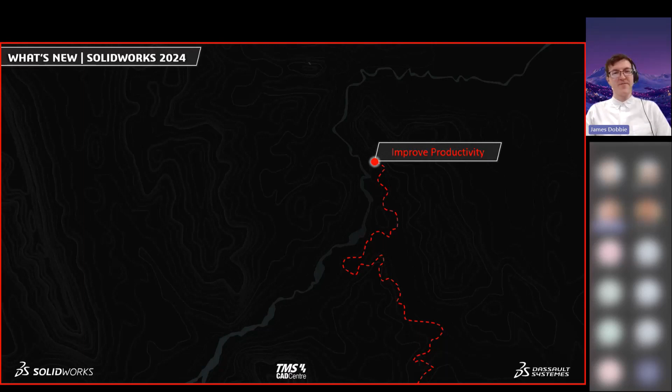To continue with the theme of adventure that this hand bike allows everyone to enjoy, we're going to take a look at the different enhancements coming to the 24 release. First up is improved productivity, where we'll see all the enhancements coming to the various desktop products you know and love.

Next we'll head on to Focus on Design, where we'll look at the future of design and collaboration with all the cloud services available today. Then finally, we'll take a look at Expand Horizons, where we'll showcase the newest in cloud-based modeling and advanced simulation tools available on the 3DEXPERIENCE platform.

This is the Bowhead Reach Adventure, a hand bike that allows you to explore all the wilderness you want to. The assembly we'll be looking at now is quite a meaty assembly. It's got over 1,000 components representing over 3,000 total bodies, and we'll be looking at various different sub-assemblies throughout.

We've got the handlebar and crank sub-assembly here, the front steering assembly here, the rear swing arm and suspension back here, the rear wheel assembly back here with all the hubs and spokes, and then we'll potentially be looking at various other parts as well. So that's an overview of the assembly we're going to be looking at here.

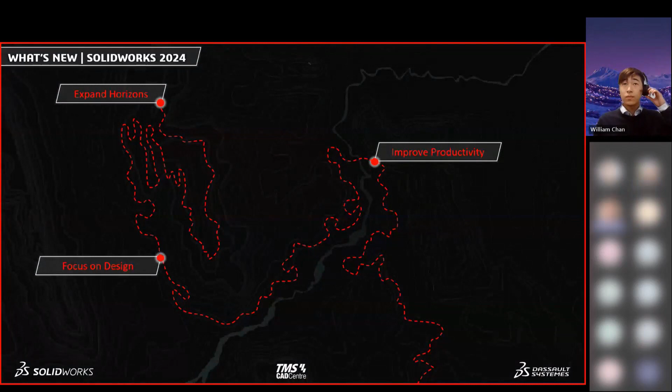So I'll pass you across to William, who will take you now into the first parts of the enhancements. Thank you, James. So we'll start off with the improved productivity section, where we'll have a look at some of the new features and enhancements to SOLIDWORKS 2024. We'll start off with user experience.

In 2024, there is now a new option to turn on hardware accelerated silhouette edges, which will provide massive performance gains in generating edges. It makes use of your GPU, and as you can see, with the hardware acceleration on, this greatly improves the display of edges. That can be enabled within the system options under the performance section.

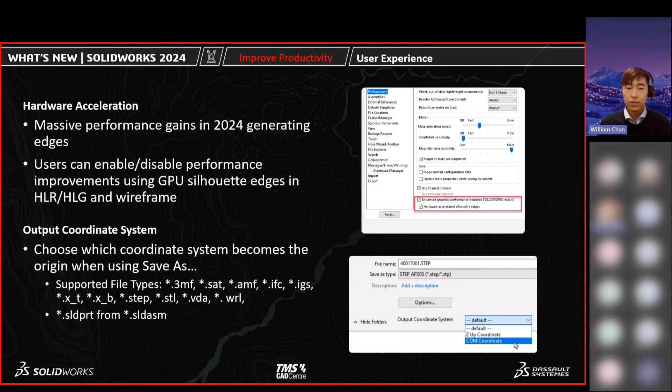The other enhancement to 2024 is that when you save a part as a step file or other supported CAD formats, such as IGS or STL, there's now the option to select a coordinate system to become the origin. This is a drop-down menu found at the bottom within the Save As dialog box.

Moving on to parts and features now, let's have a look at some of the new enhancements for 2024. The first enhancement that I'm sure you all look forward to is save to a previous version.

Let's start by opening this part, and essentially what we want to do is save this part to a previous version of SOLIDWORKS. To do this, we'll go to the Save As button here, press Save As, Copy and Continue, and then navigate down to the Save As type drop down. At the top here, you'll notice two save types: you can now save to SOLIDWORKS 2022 part and 2023 part, allowing us to save to a previous release of SOLIDWORKS up to 2 years back. We'll choose 2022 and then press save.

As long as there are no SOLIDWORKS 2024 enhancement features, you'll be able to save it and open it in 2022. The next enhancement involves the revolve cut command, which now has the addition of flip side to cut. Normally this cut would core out the interior of the part, but with flip side to cut, it cuts the exterior, giving you more flexibility with your designs.

We're also interested in what sort of bar stock would be required for this part, so to create this bounding box, we'll use the bounding box command. In the past, we only had the rectangular bounding box option; now in 2024, we also have the cylindrical bounding box. Currently this best fit option is based on the rectangular option, so it doesn't give us the best fit we're expecting, but that's fine - we can specify a custom plane for direction, and then confirming that, we get our cylindrical bounding box here.

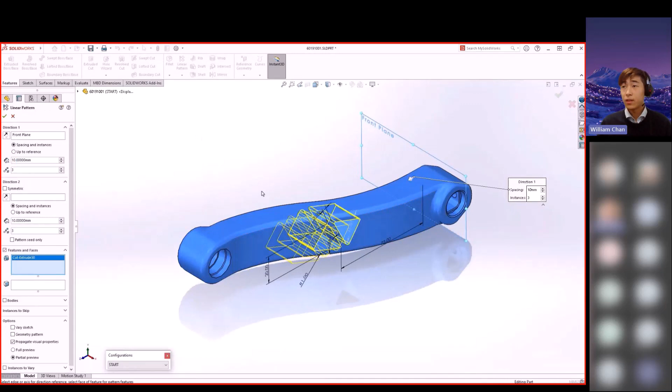We'll use the linear pattern command, and here you'll find a new option to create a symmetric linear pattern. We no longer need to use the pattern seed only option and specify the exact same settings in both fields. Just a nice little checkbox now to help speed up your workflow.

The next enhancement is a new option inside the untrim surface command. We'll first need to create a copy of our surface, using the copy offset surface set to 0, select the face, and copy it. We may want to capture the shut-off surfaces for these triangles if this part is going to be injection molded.

Previously this might have been quite difficult to achieve, but now in 2024, within the untrim surface command, there is an exclude parent surface option. We'll press that and then hide these, and we should now get these shut-off surfaces.

The next enhancements are sketch dimension preview and hole wizard positions. Let's open this part from the assembly, and we want to add in some additional holes. We'll first edit the sketch and draw in a rectangle here.

Now in 2024, you can enable sketch dimension previews, which allow you to select a sketch entity, and a gray dimension will show. This can then be selected, and we can type in our dimension and confirm it.

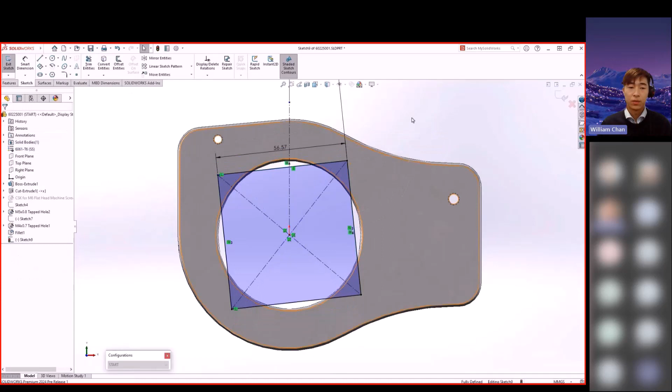Now that we're happy with our sketch, we'll add in our holes using the hole wizard command. In here, we want to define the standard and our hole size. I've got that all set up, and we'll head to the positions tab to have a look.

In 2024, you now have the ability to select an existing 2D sketch. We'll go ahead and select the sketch we did, and now it also allows us to use the endpoints of the end lines to create our hole positions. You can create instances on sketch geometry, or on construction geometry. We'll tick create instances on sketch geometry for this one.

We also have the option to skip certain instances. We can highlight the box there, select our point, and then choose not to create that hole for that one.

Finally, let's talk about some multi-body enhancements. In this example, we need to create a fixture or jig for welding this assembly, but we also want a precise understanding of the final weight of the assembly, and whether there are any interferences, say, between the weld bead and the jig.

We could do some of this inside the assembly, but we can't do a physical body weld with fillet bead, for example, although we could do some features like cuts. So we won't be able to get the actual true weight of the assembly, and it's also not easy to create the jig in the assembly either.

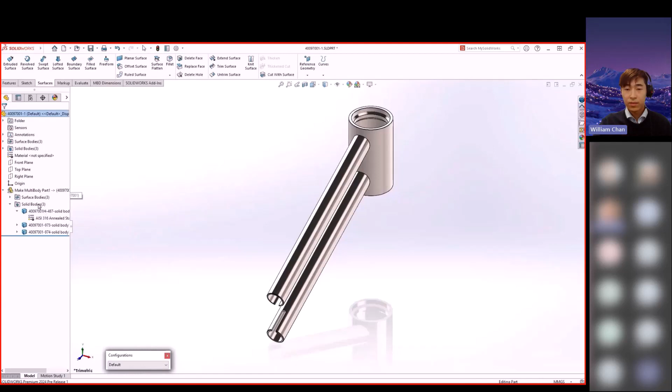So let's start creating our jig. I'm just going to use the normal surfacing commands, add a copy of those surfaces, and then thicken those up. This gives us a lot more flexibility within this environment, allowing us to use a lot more commands.

We can also show that it's in fact associative as well. So if we move the position of these bars in the assembly and then update that within the multi-body part environment, you can see that update reflected in there as well.

Another ability we have within the part environment is we can add or create material. So what we want to do here is add in our fillet beads, using the fillet bead command and selecting these faces. So if we've added the one on the top, we just need to add the one on the bottom as well.

Because these are solid bodies, we can see them in the cut list folder, giving us the ability to assign a material, which will now give us a more accurate reading of the overall weight.

Now, something else we want to do is try the interference detection. We're just going to press interference detection and calculate if there are any interferences. You can see that there are some interferences on the part, and that's fine.

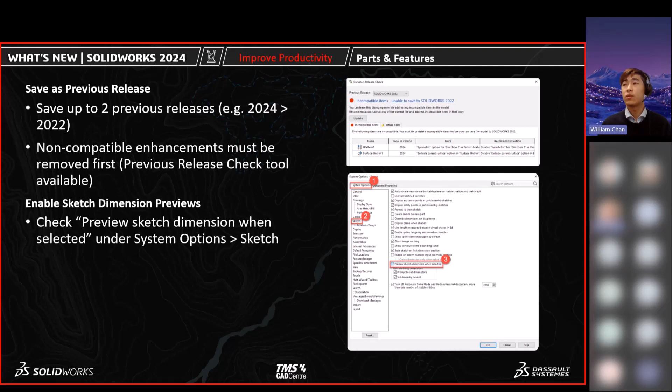So that's some of the enhancements to the parts and features of SOLIDWORKS 2024. In summary, we had the save as previous, and you can save back up to 2 previous releases, so 2023 and 2022. There is a previous release check tool, so you can use that to check if there's any 2024 enhancement features used within the part file. If there are any, you won't be able to save it back, so you can use this tool to check that. There's also the sketch dimension previews, which you can enable within the system options under the sketch section.

We also had a look at the flip side to cut, allowing you to cut out the exterior of the profile when using a revolve cut. There's also now the cylindrical bounding box option, allowing you to create bounding boxes to represent the stock size. The hole wizard has also...

has also added the ability to use the endpoints of sketch entities as well as construction geometry. So you can choose to use that if you want to. You can also skip instances if you need to. There's also the symmetrical linear pattern, just a nice tick box in the linear pattern command. And then also there's the exclude parent surface with the untrim surface command, to create the interior faces.

And then we also have the make multi-body part, allowing you to create a multi-body part from an assembly, giving you the ability to use a lot more commands and a bit more flexibility within your designs. So that is the parts and features.

I'll now pass you over to Craig, who will go over the sheet metal and structure systems.

All right, thanks for that there, William. Some nice enhancements there in the part environment, and I'm going to stick with the part environment enhancements, but focus a little bit more on some of the enhancements to sheet metal and structural systems, where we're going to look at some of the enhancements to structural systems first, and then we'll look at some of the enhancements in the sheet metal side of things.

For structural systems, we're going to focus on 3 main enhancements. We've got some changes to the corner grouping, which can be automated a little bit more now. When we've got multiple members coming together, there'll be some new options for the corner treatment. And then we'll also have some changes to the cut list and SOLIDWORKS file properties, or custom properties, where we can specify things like the units, which can be pulled through into the drawing environment as well.

For the structural systems side of things, as well as the sheet metal, we're actually going to be using the same kind of assembly that we've got here for this little cargo carrier. So we'll look at this for both of those.

What I've got open is the top level assembly, and I've got a little part open up here as well where I've got some planes and a bit of construction geometry we'll see in a moment. If you don't see the structural systems tab at the top, we can select that to turn it on, and I like to usually just show the single tab that I'm using at any given time.

Understanding the cargo carrier assembly that we'll use a little bit. This is where we'll put our bowhead onto, so we've got some slots there for the wheel, and we've actually got the back ramp in there as well that's going to be a little bit underdefined. So the back ramp, we could rotate that down, move our bowhead, load that up and then bring the ramp back up, that sort of idea, and attach that to our vehicle, probably with some wheels and stuff like that to help things out inside there.

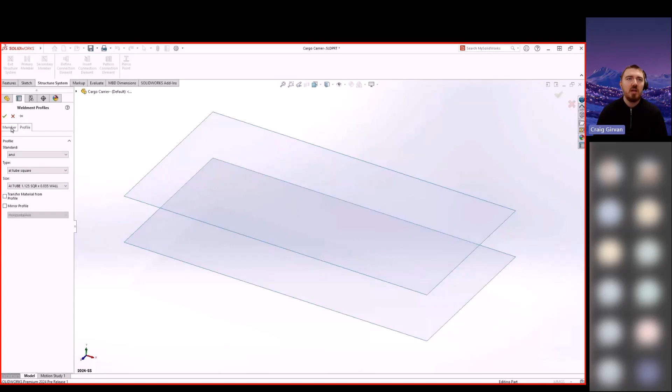So jumping back to our part, as if we were going to create that from scratch, we can start our structural systems inside there and begin with creating our primary members. Similar to weldments, we can select our profile that we're wanting to use for the structural system, and then we can start to define those primary members. We've got our different member types.

We're just going to use the 4 edges inside here, and we can deselect one of those edges if we don't want that. At that point, we can then select our secondary members, and I'm going to press the Q key here to show all my additional planes, and we'll use those planes to create our other secondary members, and then we can select our pairs between each of the primary members inside there. If there's any additional ones created inside there, we can just select those and hit our delete key to hide those out.

In this case, we're just creating more of the right-hand side where the wheel would slot in, and we can use something like the mirror command to get our other side.

When we exit the structural systems, that's where we're automatically taken into the corner treatment feature. This is where we'll see our first option, where we can use the automatic option and select a reference plane. That's where it can automatically add in some of our corner treatment, depending on what trim type we want underneath there, whether we want some bits extended.

In our next tab, we then have 3 different tabs for our simple 2 members and our more complex members, and down at the bottom here, we've got the corner treatment option. In our 2 members, we'll have the same kind of corner treatment section, but we'll now have this 4th option where we can have an open corner.

Sometimes when we're wanting to change between these, what we can actually do is zoom in on our particular area and add in maybe a little bit of an offset at the bottom. Sometimes that can make the preview a little bit easier to understand when we toggle between the different trim types, and then we can see the 4th option for a new kind of open corner. But we'll just change that back to 0 once we know that's the one we're after.

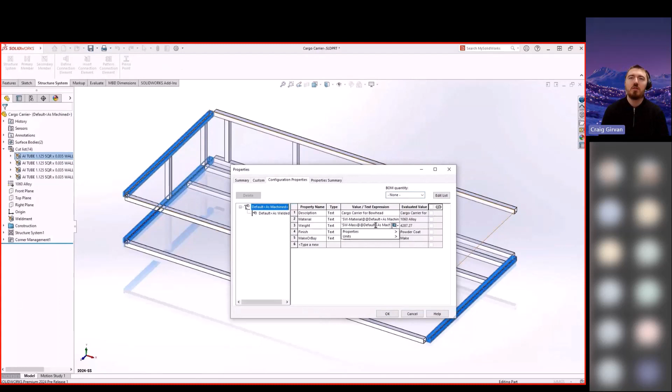If we go into our cut list properties, we might have properties in here for things like the length. Rather than having to type in manually kind of millimeters or inches, we now have a new option where we can add in the units, and it will just pull through from our document properties. We'll have the same option inside our custom properties, where we can add in things like the units for the length of something, or the units for the mass or weight. So we've got that in there in grams.

Just to show that that's a kind of live update, what we can do is come to the bottom right of SOLIDWORKS and change what our units are. So we're changing the length to meters and the weight to kilograms rather than grams. If we go back to either our cut list or our properties, we can see that that's updated. That information can then be pulled through into the drawing environment, so there's no need for us to have to type in G or KG every single time, which can be a good time saver.

At which point we can then just show the sheet metal component to go back to our kind of top level assembly. That's just some of the enhancements to the structural system side of things. We've got the new option for automatic corner grouping once we have created our secondary members, we've got that new open corner option that we used, and then some changes there to the units both in the cut list and in the custom properties.

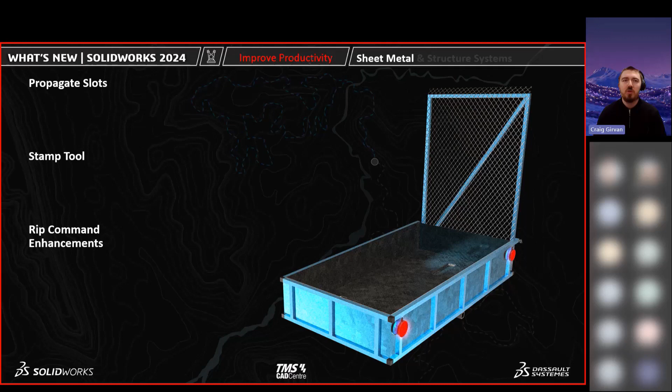So we'll switch over now to look at some of the enhancements in the sheet metal side of SOLIDWORKS, and we'll focus on a couple of options inside here. One will be the option when we're using tab and slots, where we can propagate the slots into other parts. We'll look at a new feature called the stamp tool. We'll then look at some changes and enhancements to the rip command, where we want to kind of flatten some of our sheet metal components.

We'll focus again on the same sort of assembly that we had looked at previously, but this time we'll focus in on more of the inside, where we've got some slots for where our wheels would insert. There is a third down the bottom left that's just a little bit hidden behind the front side. We'll look at creating those, and if we open up the sub-assembly, the individual parts that were created in sheet metal obviously come together, and that's where we'll have our little tab and slots inserted. If we zoom in, we can see these appearing at the bottom left corner and at the bottom.

But what we wanted to do is have our top right sheet metal component added in. We could use a mirror, but instead I'm just going to use copy with mates to copy that particular part over. We can specify some of our mates, we'll repeat the bottom coincident mate so it's nice and flat there, and then we'll just use some of our other planes to position that on the right hand side as required. But at this moment, if we zoom in, we see that they'll actually have a little bit of interference.

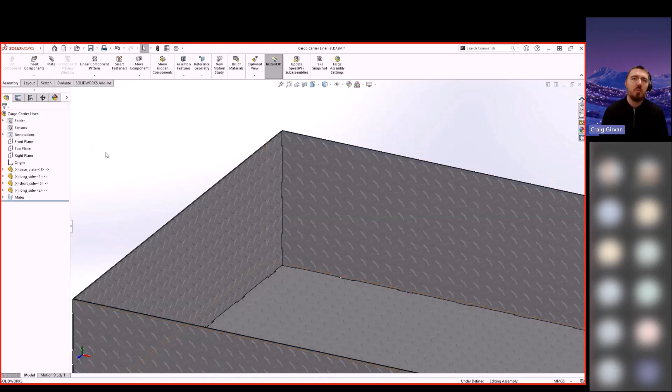We could even run an interference detection if we wanted to, but obviously I need some of those slots and stuff like that in this other component. So what we can do now is just right click that, and we'll have this new option to propagate into the slots. If there's more than one instance of this particular part, we can copy those slots into those other components as well.

Then if we ran our interference detection, we should find that there's no interference, and we've got the slots and tabs blended in nicely, just with a little bit of an offset between them. If we open up the bottom component, the base part, we can see all those little tabs and slots running along the top, left and bottom. But what we need to do is start to add in some of the things like the slots for the wheels.

What we've got here is a fairly simple sketch, pretty much just a rectangle that's been fully defined. If we go to our sheet metal tab, we could use this new stamp tool. The stamp tool may not automatically appear at the top of our command manager, but if we search for it in the search box at the top right of SOLIDWORKS, we can drag that feature into our command manager so we can easily access it in future. We can then just specify some values to get this fully defined.

Obviously what I want to make sure is there's no sharp corners in this part at all, so that once the wheel rolls onto it, we're not going to end up causing a puncture or anything like that. So we'll use quite a lot of these radius values, round out the corners inside there, and then we'll just accept that. We can see from quite a simple sketch, just a rectangle, we've added in quite a bit of geometry inside there.

We then just have a second sketch, which is just two sketch points that we can use for our sketch-driven pattern to get our second and third slot for our wheel. So we'll come to our different pattern types, select our sketch-driven pattern, and for our feature that we want to pattern, that's where we'll use our new stamp tool. We can select that, and that has now got our three different holes in there for our wheels.

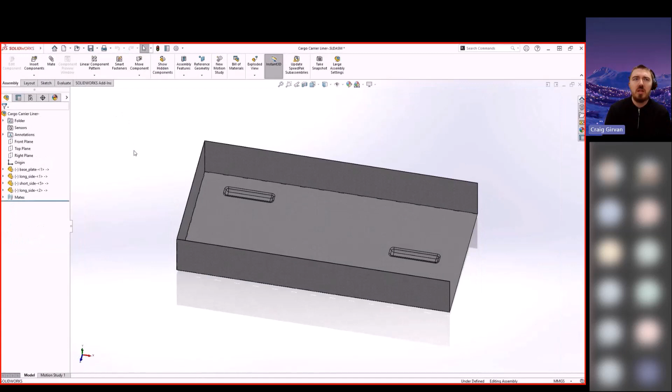We can jump back to the sub-assembly, and we can obviously see those inside there. And jumping back to a top level assembly, we'd see those in there as well.

What we might want to then do is create this little tail light that we might have, and this is again going to be another sheet metal component. So going back to a little bit of an earlier stage in the design, what we might have done is just created this using our extrude command. Obviously at the moment this cannot be flattened. But what we could do is inside our rip command, look at one or two of the new options inside there so that we will be able to flatten this and even add a little bit more detail inside there.

So what I'm going to do is select an edge in here. And then what we want to have had is just a single sketch point for where the rip would take place. So I'm going to select that sketch point at the very bottom. And then what we can do is specify some parameters on the left-hand side for how big the rip should be, how much of a gap should be created. We can specify that either by a set distance or an angle inside here.

So what I'm going to do is specify 3 degrees as the angle and make it symmetric, so there's 1.5 degrees going clockwise and 1.5 degrees going anti-clockwise. And if we need to, we can add an offset to that as well, depending on whether it's degrees or a set distance inside there.

Now that that's been ripped, we can use our S key to get up our quick features, and just use the insert bends command, select the edge that we want to be static, and then accept that. Now we've got our process bends, and we can hit our flatten button at the top to get to our flattened state, and select it again to get back into the folded state.

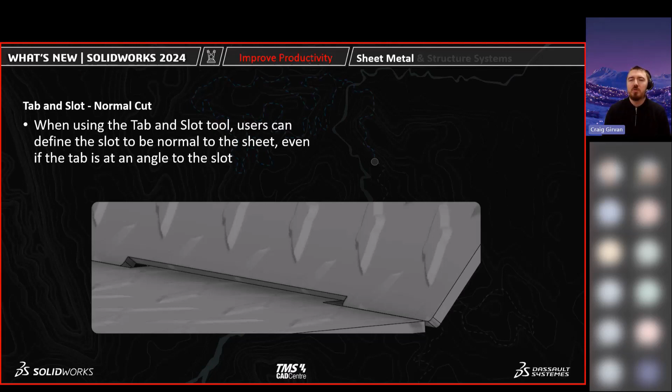So we do have options for a kind of normal cut if that's coming at a bit of an angle as well.

So I was looking at that propagate slots, and we've got our multiple different parts. The new stamp feature, which doesn't have to be a rectangle - you can create a bit more of a complex sketch if you want. And then some changes and enhancements to the rip command inside there.

So that was the enhancements to the sheet metal and structural systems side of things. Now it's going to stick with myself to look at some of the enhancements in the assembly environment. What we're going to look at is quite a few enhancements in here.

First one will be some changes to the insert components, so when we start to add in our second, third, fourth, and so on components, and start adding in our mates to get them in position, we'll have some changes to the width mate. And also if we're using mate references, we'll see some new options inside there.

When we are starting to add in multiple instances of a component, we'll have a new option where we can edit the component references in bulk, rather than having to do it manually one by one. If we're using the defeature tool, then we'll have some new rule-based options inside there.

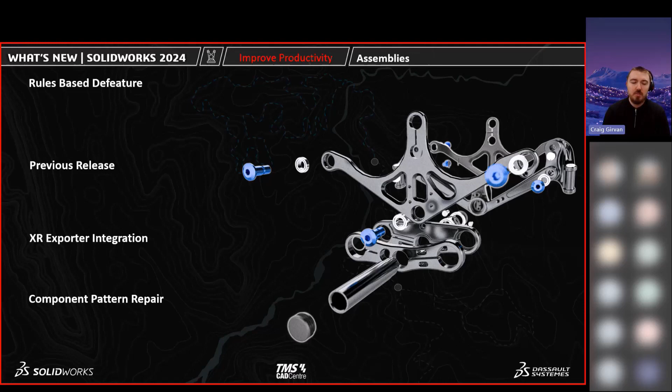Similar to what William showed, where we can save parts in a previous version, we'll have that for assemblies as well. We'll have built-in XR exporter integration when we come to save out things for VR and AR inside there - no need for an add-in anymore. And then we'll have an option where if component patterns start to lose some references, we can have that automatically repaired a bit inside here.

So we'll take a look at this little assembly. We've got some of our components already added in, but what I want to do is add one more of these little knuckle arms that's down at the bottom right - I want to add another in the top left. So let me go to my insert components to insert that particular part.

Before, we may see the configuration name, but what we can now have is actually the description shown inside here, which can make it a little easier to make sure we are indeed inserting the correct component. Once I've selected the correct component, we can change at the bottom how the green tick box will interact. Previously it would just fix the first component and then float all the other ones, but now we can change that to where it floats the components when we hit our green tick, or just fix the first time we use that. So we could use our float option, that way when I hit my green tick, it'll insert that part, but I'll be free to drag that part around as I want.

So what I might want to do is just drag that and rotate it a little bit to roughly position it where I want, which can sometimes make it a wee bit easier to add in some of our mates. Now ideally I should probably rotate this round about 180 degrees, because it'll create a little interference as I start to add the first couple of mates, but we'll show one of the enhancements added in last year that lets us tidy that up very easily.

Smart mates have been around SOLIDWORKS for ages, and we can do that without having to go into our mates command. So here I'm just dragging using our Alt key to add in our first concentric mate, and then we can use the same method to add in our second one - select one, hold down Control, then select the other circular edge or face, and add in our concentric mate inside there.

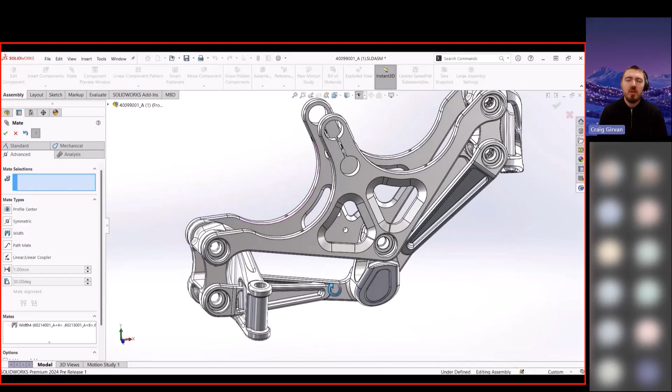We've got a wee bit of interference just because one of the concentric mates was added in the wrong direction. So what we might want to do is flip one of the mates round. If we come out of our mates feature and expand it out, we can find one of those concentric mates we just added, and from right click, we can flip the mate alignment. I'll just position it around. We'll accept the alignment - I don't need to change the other side, it's perfectly fine as it is.

I'll just quickly change the display state, which is where we've got some additional components that have already been hidden out. And what we might want to do is add in some more components on the right-hand side.

Now, I can hold my Alt key, or Control key to copy this, and then Alt key to add in both a coincident and a concentric mate. So what we can do is position this by using the circular edge with the hole inside here, using the Alt key. Remember, you can let go of the Alt key once you've started to drag and you've got that pin and slot icon inside there.

Now, this is obviously free to spin round. Sometimes to make that a bit easier, what we can do is right click and temporarily fix one of our other components. That'll be fixed in place so we can't drag that, and that means we can see that this can indeed rotate round.

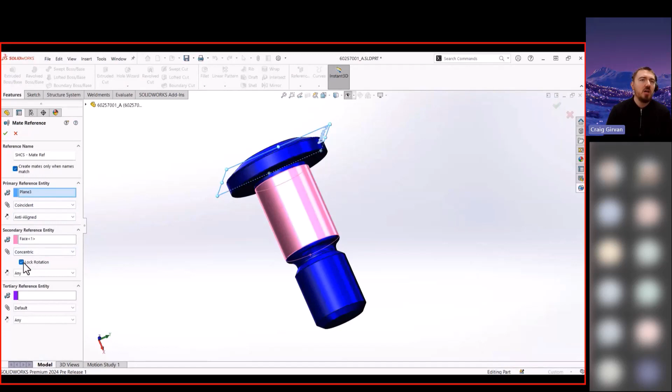Now what we could do is potentially prevent that from rotating. If in our components we were using mate references, when setting those up, right click to edit the existing mate reference, and we'll see two new options. First, we can select to only create mates when the names of the mates match. We'll also have this new option where we can lock the rotation, which prevents the component from spinning on its spot.

So we'll add in some of these additional blue components inside here. We've got two, the bottom left and bottom right already, and we can hold our Control key and copy those. But what we'll see is this new select mate reference option, and what it will do is detect if there's any similarly named mates that are the same size and type.

So we can choose to insert that into one of the other ones. When we hover over this, if I select the third one, rather than add it into the middle, I'll actually add it on the far right. In this case, I do want one in all three of those. So we've actually got 5 of these components, and there's another 5 on the back side, so 10 in total. If we look at our feature manager tree, we'll have a total of 10 of those components.

Also, I've got the 2 other components that we added in before we added those other last 3. So what I might do is just drag the 2 of those to the bottom of my tree. Remember, the order of parts in your assembly doesn't actually matter. So now we've got our 10 pivots next to each other.

What I can do is with all 10 of those selected, if I right click the top level assembly inside here, I'll have the option to edit the component references. This is where previously you'd have to right click each component one by one to edit this. What I'm going to do is add a little reference that specifies whether these are the pivots on the front or pivots on the back.

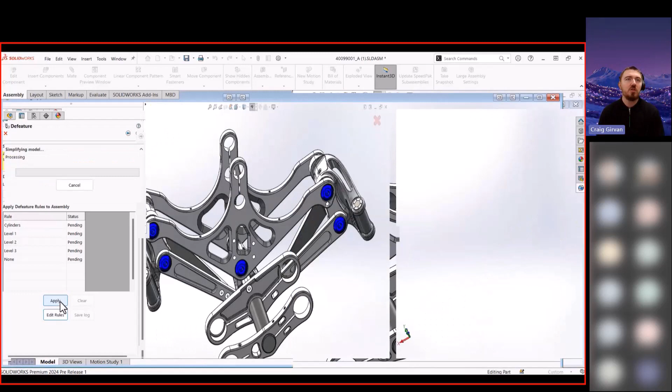What I've got set up here is where it's going to read from all of our individual parts a custom property called IP level, and for each part that's either a 1, 2, or 3. What we might choose is if there's a value of 1 for a part, that's where we might have our full copyright, our patent, all of that in place, so we're not really worried about customers or clients seeing all the detail. But when we've got a 2 or particularly a 3, that's where we maybe haven't got the patent and all of that in place just yet, so I do want to defeature that particular component.

We'll see here, once the defeature tool is generated, we'll see in the preview some of our components have been simplified quite a lot, hiding out a lot of the detail. But some of the components, like the ones we added on the far left and far right, we've still got all that detail added in there. And we can group some of those components together if need be.

Once we've generated that new one, we can either save that as a brand new document or save it as a new configuration. I'd probably recommend a new document personally, but you've got the options to choose what you need.

What we can then look to do is save that. If we change the save as type, similar to what William showed in the part environment, we'll have the option to save the assembly in 2023 or 2022 format, along with the parts that go with it, so someone can open it up in a previous version, going back 2 years. So we can hit save and save it that way.

What we also have under the save as type, particularly for assemblies, are two options you may have seen before if you installed the add-in - the GLTF and GLB formats. So if you're wanting to create any kind of VR, AR models, you can save out as those formats. Previously you just had to install the separate XR Exporter add-in, which was actually in beta before, but now that's fully integrated in SOLIDWORKS 2024.

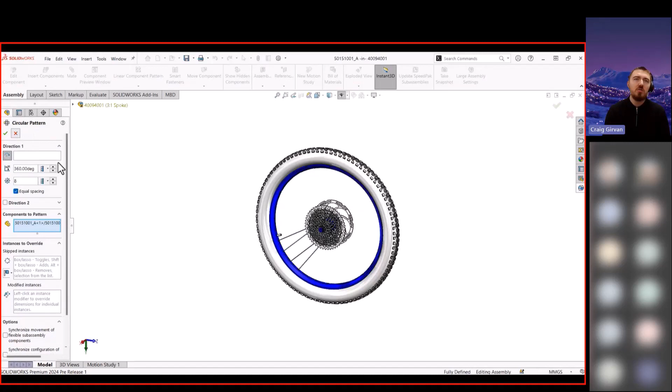So the issue here is with our circular pattern. If we edit that circular pattern, we'll find that the temporary axis used for the direction has been lost. Rather than me having to try and select an edge, I can just right click and there'll be a new option to auto repair that. It will look at where the temporary axis previously was, see if there's any circular edges in our model that have this same temporary axis in the same position, and automatically reuse that instead. That'll tidy up our model, and now that's looking fine.

So that was some of the enhancements in the assembly environment. Starting off, we looked at inserting components - we have new options there to show both the description, and we can change the behavior of how the green tick works with fix flow or fix the first. Some changes to the width mate, renaming and better behavior inside there. Some enhancements to the mate references if we're using that, and we can now add component references in bulk rather than having to do it one by one. The defeature tool can now be rule based, and we can also customize that rule. We can save the assembly as a previous version, similar to the part environment. We've got automatic XR Exporter integration inside there, and we can also automatically repair some of the assemblies as well.

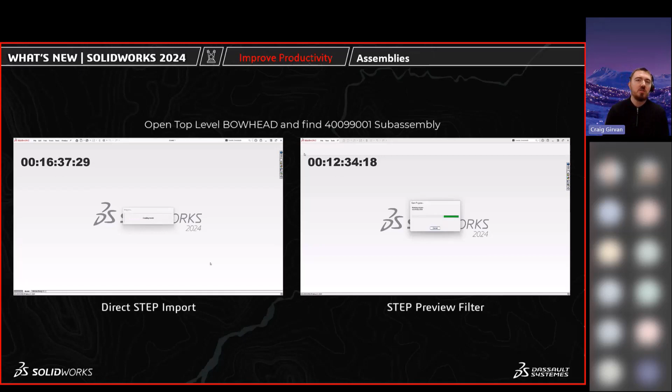What I've got here is a comparison of that new option we looked at when importing step files. On the right, we've got the preview filter turned on, and in this case we're going to import absolutely everything. So even though there's one or two extra clicks with the option turned on, because we've got the option to see a preview to check if it looks okay to begin with, what we'll actually find is with that option turned on, the import will be a lot quicker.

So on the right with that option on, we've got it imported in just over 12 minutes, whereas with that turned off, we're looking at just shy of 17 minutes. That's both with SOLIDWORKS 2024, just with the new option on the right - something I definitely would recommend. The only reason the two previews look a little different is because one of them has the RealView graphics turned on, but that doesn't really have an effect on the import time. That's obviously a little render of that particular assembly inside there.

One or two final enhancements in the assembly environment: if we open up an assembly and potentially we don't have some of the components - maybe because somebody hasn't sent us the components, or because we no longer need them, so somebody's deleted them in Windows or something like that - we'll now have an option where we can delete all the missing references in bulk. In this case it would delete 2, but we could delete as many as are missing.

We'll also have, when selecting our different components from the drop down at the top of SOLIDWORKS, the option to select all of our sub-assemblies that are set as flexible inside there. If we're creating mirrors, particularly opposite hand versions of the mirror, we'll now have a system option where we can preset a naming scheme. So rather than having to type in every single time the right image, dash mirror, dash new, or anything like that, we can preset that up in our system options.

Thanks, Craig. So now we're going to look at some of the enhancements to drawings, as Craig mentioned. Our first one here, we're going to look at...

Reattaching dangling dimensions, and chain dimensions as well. These are some nice enhancements. With chain dimensions, a nice way to create stack dimensions that are relative to each other's preceding features, the enhancement here is that they will now automatically come in aligned collinear.

That will reduce any manual cleanup steps to help you out. And the other change here is for any tight spots, as we can see, there will be a new system option that will automatically offset them as well, helping you put them in a bit quicker and reducing how much manual cleanup you need to do.

The other change when it comes to working with dimensions is if you hover over any dimension, it will now highlight the geometry it's attached to. So in the case of a dimension that goes between an edge and a circle center, if we hover over that, it will highlight those, making it easy to see what's attached to everything.

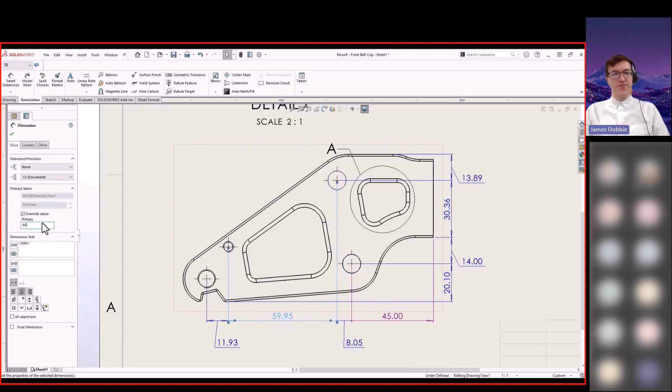The next thing we can do is a new option to highlight overridden dimensions. If we override a dimension, which is nice and easy to do, just select the dimension, say we want to override it, and pop in a value, we can now see that those are highlighted a different color.

The color used and the behavior of this is controlled in your system options and document properties. In document properties, you can go down and select the option to highlight the color, and what color is highlighted is controlled in your own system options. So if you don't like the default, you can always change that around.

That will allow you to see those overridden dimensions nice and easily. Then when it comes to restoring the original value, simply right click and select restore original value, and that gets you back to what they were. So nice enhancements there to overriding dimensions.

Just like with parts and assemblies, you can also save drawings back to previous versions. Simple case of just going to save as, picking the year from your drop down, and all of your referenced components, parts and assemblies within the drawing that are needed will be included in the save, and it'll save them with those.

A nice easy way to gather all the components, saves you having to figure out what assembly you need to save back. It pulls it all together in one go. And of course you can add prefixes, suffixes and all that at the same time.

Now when it comes to dangling dimensions, there's an enhancement here in terms of reattaching them easily. You simply right click on that dimension, hit reattach. The red X will show you what you're going to be reattaching. Then you just click the edge that you want to reattach that to.

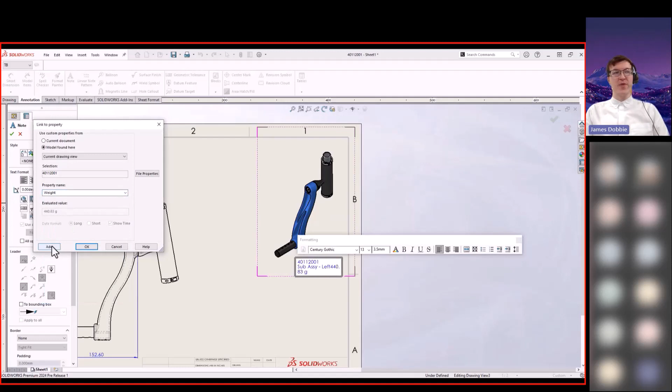That allows you to add multiple properties to your notes without having to keep going back and opening that up, so it's a real big time saver there. And then obviously if we change the configuration, all those properties will update nicely.

So next up here, we're going to look at MBD - that's the model-based definition where we can dimension in the 3D environment.

Also forgot to mention some other small enhancements that didn't quite make the clips. There'll be an option to improve your performance when opening and working with drawings, by setting them to by default open in detailing mode. Similar to your large assembly settings where you can define a threshold for when assemblies open in lightweight mode, this is an option to always open your drawings in detailing mode, which helps you open them a bit quicker.

You can also, when working with layers, select multiple in one go. So if you're deleting layers, changing colors, or changing line styles, you can select all those and work with them nice and easily.

The other thing here when it comes to exporting DXFs, there'll now be an option to exclude any hidden sketches. So if you haven't deleted them out or dealt with other difficult things, there's a nice option to exclude any that are hidden.

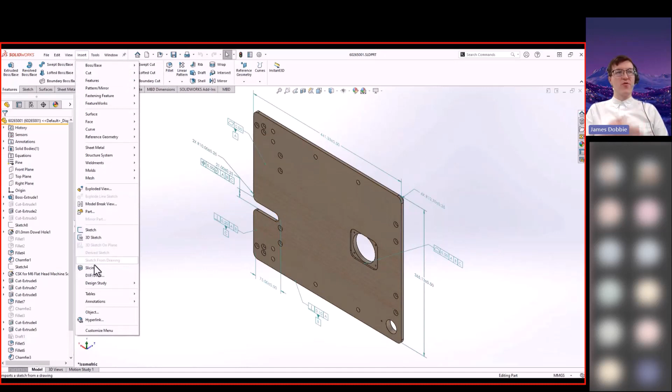So in this case, what we're going to do is look at some of the enhancements. First thing here is that there's now going to be an option to have the dimensions always display on top of the model. Previously, if those dimensions were attached to something on the back, and we were looking at the front, the leaders for those dimensions wouldn't appear - they'd be hidden behind the model. So that's a new option there.

Next thing with hole tables - a great way of reducing clutter if you've got lots of holes. To set those up, you just insert the hole table, pick the faces, define the origin here with the axes, and then pop that in. There'll also be cross highlighting, so when you highlight a particular entry in the hole table, that will highlight the hole on the part as well.

So now when it comes to saving out your MBD information, there are a couple of different ways you can do it - with 3D PDFs, step files, or eDrawings files. Now with your 3D PDFs, you've got lots of different templates, and included this year, you'll be able to also have your hole table on one page by itself. 3D PDFs are great because you only need to have Adobe Reader installed to use them.

The other enhancement here when it comes to step 242 is for the first time you'll be able to include your custom properties in your export. That allows any downstream applications or anything like that to read those properties there - a great handy feature when it comes to working with MBD.

The next thing we look at is the various tolerancing and dimensioning enhancements. There's been nice enhancements when it comes to those - we'll look at those now.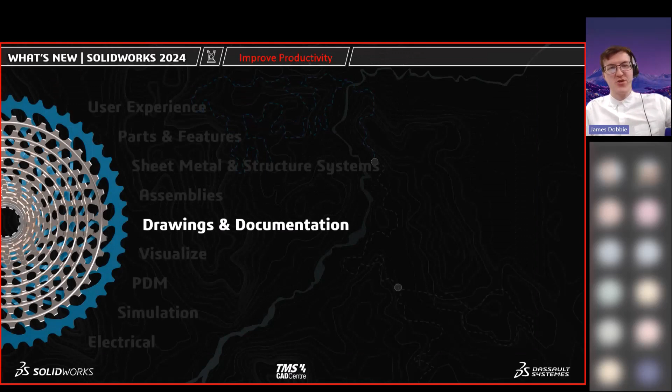Thank you, James. Now we'll have a look at Visualize. In 2024 Visualize, we see great improvements to the rendering power and a more streamlined user experience. Appearances are one of the most fundamental parts of using this rendering package.

With appearances, the format has now been completely overhauled with an all new DSPBR format, which stands for Dassault Systemes Physically Based Rendering. Here we can select the enterprise PBR shading model type, and now we have a lot more options, allowing you to create complex and nuanced appearances. With the goal of flexibility and consistency in mind, the DSPBR format is in line with industry standards, and it will become a universal format for communicating appearance data across all DS products.

The DSPBR format is well suited for making use of image texture maps, which are typically great for quality renderings. With this, we can select a single or multiple texture maps and simply drag and drop them from Windows Explorer onto the model, and they will be automatically pointed to a map slot. If multiple map slots are selected, the format will reference common naming conventions and auto-load them into the correct slots, allowing you to set up these appearances quite easily. Alternatively, textures can be added one by one by selecting the map slot and pressing the plus button, then choosing the appropriate file.

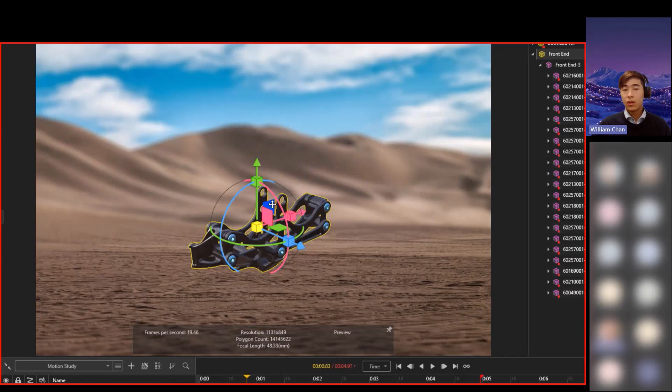Setting up your scene can be one of the more time-consuming parts of the rendering process. Visualize 2024 dramatically reduces this time with a revised manipulator. Here we have a new manipulator which looks similar but offers a much cleaner experience. The manipulator now highlights each control, making it more clear which action you're about to take. The scale tool is now fully integrated with the manipulator and will accommodate translate in all directions, scale in each direction as well as all directions, move in any plane direction, and rotate on any axis.

You can also now activate and control the manipulator through the keyboard. Translate, rotate, and scale can be launched with the keys G, R, and S, which you can of course customize if you want. Beyond that, each mode can be restricted to the X, Y, and Z axis. For example, if you press G and then Z, that restricts the move to the Z axis. Planar moves can also be restricted by pressing the Shift key - for example, pressing G, then Shift, then Z allows you to move the selection within the XY plane.

If we press the R key and then Y, this allows you to rotate your selection on the Y axis. Even more powerfully, you can now activate the local axis of an object when it is not aligned with the global axis. For example, if we press the G key, Z, and then a second tap of Z, this allows us to access the local axis of our selected object. Likewise, other axes can be accessed with the G key followed by double tapping the X or Y key.

Several interface elements have received a facelift for 2024, but the output wizard is one of the most used tools in day-to-day work, with convenient options like customizable presets for commonly used settings, and cleaned up tabs that only provide the necessary information. Control over configurations, multiple cameras, and multiple sets is now as simple as selecting the desired outputs from the drop-downs.

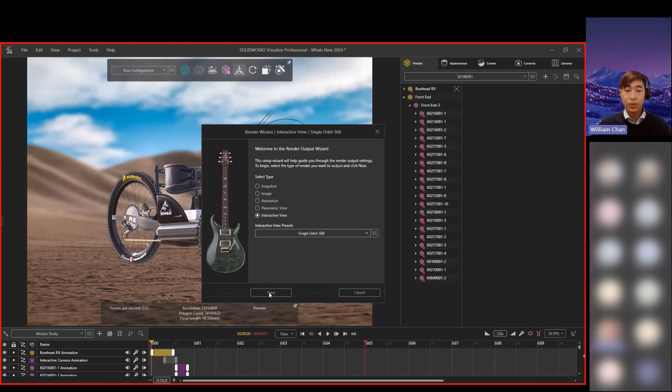More complex outputs, such as interactive renderings, have been simplified as well. Animation frames can now be used as interactive inputs, which opens up all kinds of creative options for interactive playback. The interactive outputs can now be previewed right within the output viewer, and it can also be exported for playback in the 3DSwym app within the 3DEXPERIENCE platform.

The final enhancement: sunlight environments can now be added to see how products will look in real time and place. The sunlight environment provides an updated compass rose so that north can be set manually or by selection on the model. A drop-down for position or coordinates can also be pasted in. There's also the ability to adjust the time of day and many more. An updated animation wizard now includes controls to set up animations of a product quickly and easily for a day or throughout a span of time.

So that's some of the enhancements in SOLIDWORKS 24. It's easier and faster than ever before to make your products look great.

As mentioned, we now have an all-new, powerful, flexible, and accessible appearance format, the DSPBR format, allowing us to create more complex appearances. We also see changes to the manipulator, enhancing the overall user experience, allowing you to use shortcut keys to activate and customize as required. There are also interface updates, so the wizards have been updated for greater clarity and ease of use. And then finally, we also see some improvements to the sunlight environment with an updated compass rose, allowing you to define a physical location, the compass direction, time of day, and many more.

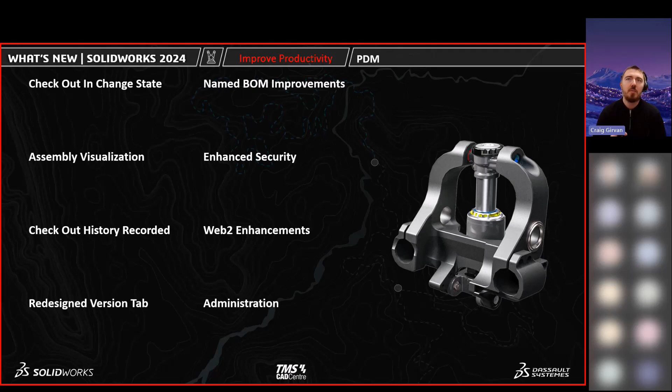What I've also done here is note that one or two of these enhancements will actually have been added in later service packs of 2023, so there's a little note at the bottom. Most of them will be enhancements in PDM 2024, but one will be in 2023 Service Pack 2, and another in about Service Pack 4. That will be highlighted at the bottom as we go through some of the next enhancements in PDM.

Starting us off, workflows have been a great way for a long time to show where a design and model is in the approval and development process. But when a file gets rejected and changes need to be made, what we can actually do during that transition is check those files out at the same time. So there's no need to change the state, reject it, and then check the files out separately.

When we're looking at assembly visualization inside SOLIDWORKS, we can change what information is being shown, but now at the bottom of this drop-down is a list of PDM variables. So we can potentially show the state of a file, seeing visually what files have been released, which are pending approval, work in progress, and so on, depending on what our states are called.

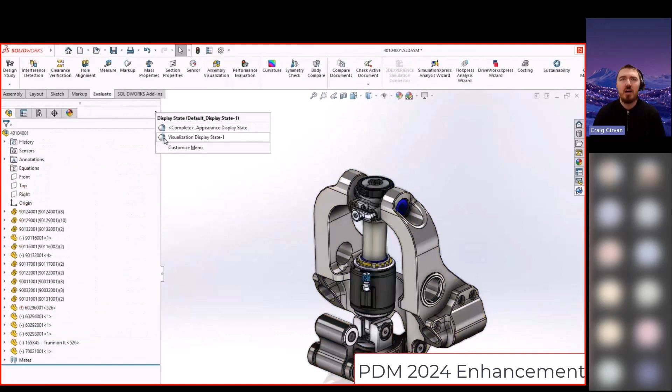We can move our rollback bar up and down to hide and show different features, and we can create different display states and leave that toggled on as we make changes. I'll make a small change by unsuppressing some folders to get more cutouts, and we can toggle between the display states at any point.

Since we've made a change to this model, we'll want to check that in, then submit it for approval, adding a comment. Now that we've checked that out, in the history of a file we can see when it's checked out, and who and when, and then see the history and get previous versions.

When we get that previous version, if we go to our Versions tab, we'll see that's completely changed. The top half shows the latest information about the file, and the bottom shows whatever version we're looking at—in this case version 2—with information related to that in the bottom half.

Moving one tab along, some enhancements in the bill of materials. With our named bill of materials, if any columns are hidden inside SOLIDWORKS, we can unhide or hide them on the PDM side, so we don't have to jump back to SOLIDWORKS just to unhide stuff, and we can make changes to a bunch of those at the same time.

In our Contains and Where Used tab, if we don't have permission to see some of the sub-assemblies or sub-components, they'll now be hidden out inside there, improving security.

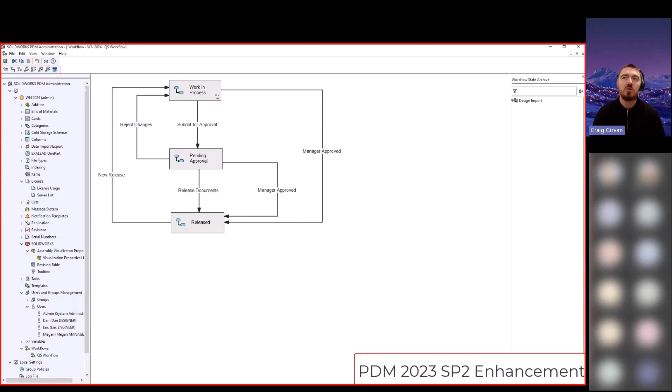Another enhancement, one I've seen a lot of customers ask for, is the ability to archive or hide any states no longer used in a workflow. Previously, if you tried to tidy up your workflow and delete a state, you'd get a message saying a file exists, or did exist, in that state, and you were unable to delete it, so you had to leave it off to the side, like what we've got here. But now you can actually archive those, which can really tidy up the workflow.

So that's some enhancements to checking out a file when changing the state, useful when files are getting rejected and you need to make edits. We've got assembly visualization integration to view that information visually inside SOLIDWORKS, and we can view when a file was checked out for better traceability of files.

The Versions tab in Windows Explorer has been redesigned to show a lot more information. We have some enhancements to the named bill of materials, so we can hide and show columns and edit multiple columns at the same time. The security is obviously updated with the contains and where used tree view, if you don't have permission to see certain files.

In the web app, we have the new grid view, and we can select what different versions we want to download. On the admin side, we can see who we're logged in as. We've got different permissions for the license, so server information and who's using a license, which you can also still see in the SNL manager if you've got that. And the archive states can be really handy on the workflow side of things.

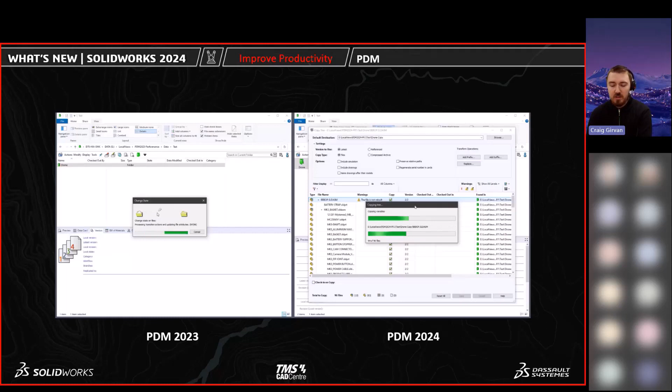We'll give it just a couple seconds and 2024 will have finished. I won't make you sit through the full 2023 video, but just so you know, in 2024 we were taking about 1 minute and 16 seconds. On the left in 2023, the full process took about 2.5 minutes - so pretty much half the time.

A couple more enhancements here in PDM: with PDM Professional, you can now have serial numbers integrated if you're using the dispatch. You can also do more actions in the dispatch, like moving, renaming files, and changing some of the data card variable information.

We'll also have a quick tool to change the state of a file when we're in the search. So if you've run a complete search, you'll have that now appear at the top, and you can use the keyboard shortcut Control T to start changing the state of a file.

We'll also have an option that used to be specific to the admin user, or the super admin as I like to call it, and we can give this to any user or group of users we want. That's the ability to see files that are in the private state - files users have created inside their PDM local view but haven't checked in yet. You'll never be able to edit them until the user checks them in, but you'll be able to see that they are indeed working on stuff in their local view.

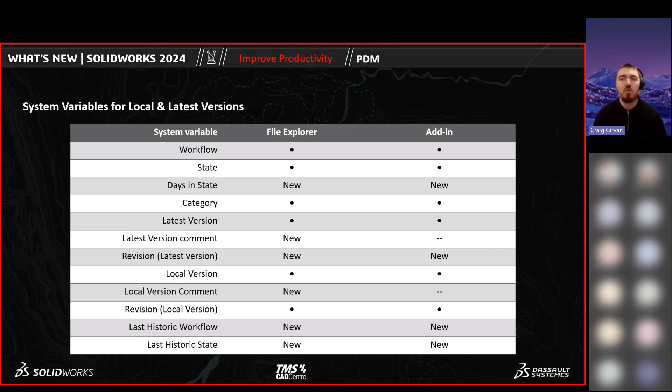And then obviously we've got some new system variables that are viewable when we're looking at the latest information. So whether it's Windows File Explorer or the add-in inside SolidWorks, we'll be able to see more information. That's what we've got here marked with the new option. And that's the enhancements to PDM.

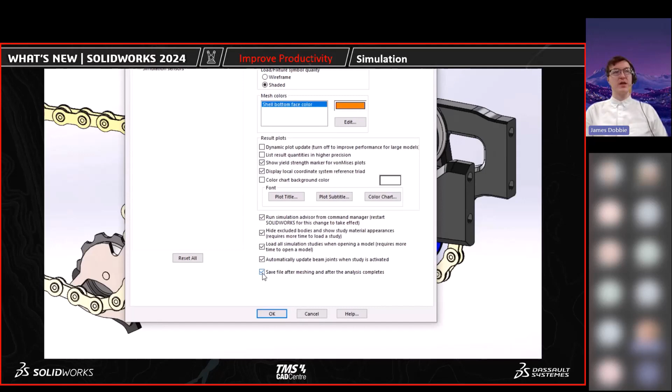Next we're going to look at copying our studies. If you know you're going to maybe change the mesh, maybe use a different mesh, or make some changes to the model, rather than have to copy the mesh and the results with that study, you can now set the default behavior to choose what you want to do. That will just help save disk space and help you copy things quicker. And on a per-study basis, if you do want to include the mesh, for example, you can still include the mesh when copying that specific study.

So what we're going to look at here is the chain tensioner. This is where the chain is coming from the rider arms, coming down and then transferring it to the rear wheel. You want to make sure that when the chain is running through the chain tensioner, it keeps both chains on the cogs, ensuring the chain doesn't drop. Last thing you want is when you're pedaling away, the chain drops and you're suddenly left with no power. So in this case, we're going to load up a prepared configuration of this part, simplifying it out a bit.

Then what we're going to do is start setting it up. In this case, it's bolted to the tensioner by 2 bearings. So what we want to do is replace these physical models with our virtual connectors, just to allow us to precisely enter in the properties of those. So in this case, we can come in here and suppress out those parts that we're not going to need.

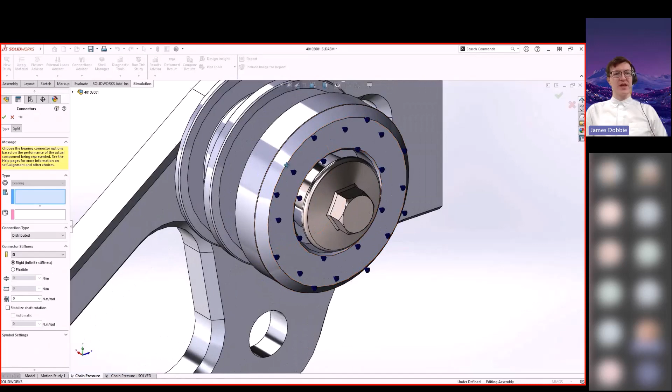And then what we want to do is set up our bearing connectors. Now that we've suppressed those parts out, we can come in and put in a bearing connector. One's already been created for us, so we just pop in the other one. It's a case of coming in, popping in our bearing connector, choosing the outer face of the shaft. Now, a cool tip is if you press the right mouse button, it will automatically jump you down to the next box, from the blue to the pink selection, to make that a bit quicker when making your selections. That's a nice tip just to save you a bit of time.

Now the next thing we have here is the options we have for the connection type. So this new one, distributed coupling, allows the faces that are attached to the bearing to deform. Just a bit more of a realistic representation of your bearing behavior, so we can select that there.

And now we're going to add in some of our lateral and axial stiffness to the bearing, as well as defining the new tilt stiffness, and the extra option there, the torsional stiffness as well. So lots of new options in there that we can control to more realistically represent our new bearing enhanced connector. So the next thing we want to do, now we've set up the connections, is apply the loads.

In this case here, we're just going to use split lines to split the faces of the rollers, just to more realistically represent the loads. By pinning our property manager open, it's going to allow us to add multiple loads in one go without having to keep coming back and selecting the option to add a new force. So we'll select the bottom bit of the face here, add in our force, pop that in, and now we can go in and select our next face, add in our force. Then once we're done adding all our forces, we can come in and unpin that, so now when we hit the green tick that'll close that property manager away. It's a nice handy thing you can do there, just to add multiple forces nice and quickly.

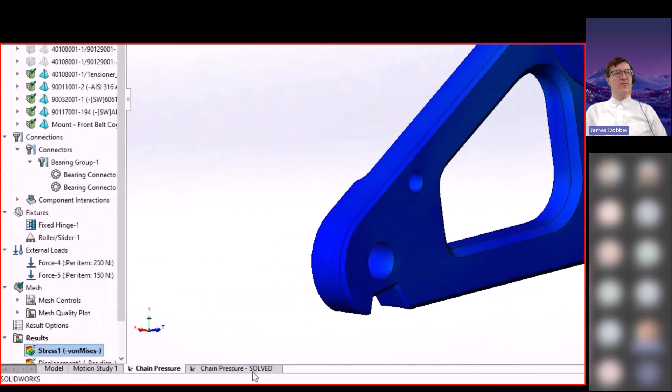So now what we want to do, I've got a nice solve one here with some different plots. Looking at the stress of the part, we can animate them to see how it moves. We can see a lot of the stress coming from that bolted shaft there that connects it, so that's our main area of interest. Then we can check out some other plots like displacement, see what's moving the most there. We could see from that animation, obviously exaggerated, where all that was coming from. So now we can look at that and really use that to investigate all those areas, and we've got all the different plots that we can get our results out of.

So definitely giving you a bit more realistic options to represent bearings, and just to really help you run the simulation quicker and also get more realistic insights into your designs there.

Some other enhancements: there's a new plot to identify locations where there's any contact convergence issues, so that's been added. There's also been some enhancements to the meshing performance when it comes to using the blended curvature-based mesher, so for any parts where you do have curvature involved, using that blended curvature you'll get a bit better performance when it comes to meshing.

Next thing we have, looking at the plastics side of simulation, there's been some enhancements here in terms of the injection location advisor. That'll take you through and suggest some optimal gate locations, so it's definitely going to improve the user experience when using that. Saves you having to rely on experience or guesswork where to position them, it'll give you a good starting point of where you want to place your gates.

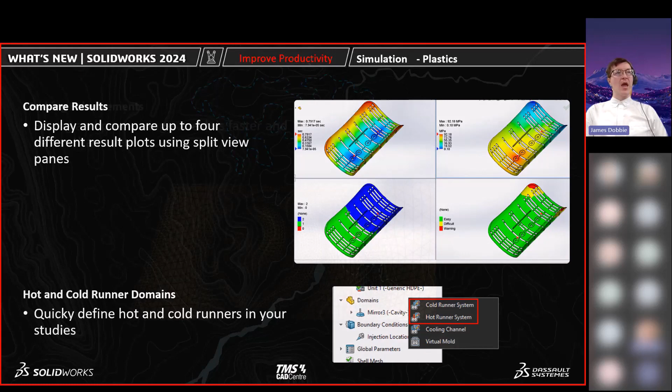And also, with plastics, it's had similar enhancements when it comes to meshing. It'll mesh and save that mesh faster than ever, saving you even more time.

So what I'll now do is pass you across to William, who'll take a look at the electrical side of things.

Thank you, James. So we'll now have a look at some of the enhancements to SOLIDWORKS Electrical 2024, looking at enhancements to electrical schematic, electrical 3D, as well as electrical routing.

Starting off with electrical schematic. In 2024, you can now insert auto balloons within a 2D cabinet drawing, allowing you to quickly place these balloons within the optimal position. This can be paired with a BOM table as well, that allows you to locate the footprint using the hyperlinks embedded within the BOM table. Just a nice additional feature there.

The next enhancement improves report readability. In 2024, you can now condense component marks or any text matching pattern to a range. For example, instead of marks A1, A2, A3, you can now condense this to just A1 to A3. This helps save more space on your pages and minimizes tables being split onto multiple pages.

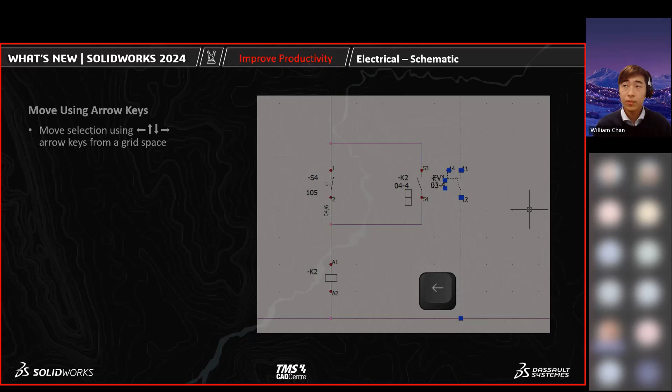Previously when deleting a manufactured part from a component, the manufacturer data was still kept inside the properties of the component. Now in 2024, you can configure your project to reset the manufacturer part information from the component, which means when you delete the manufactured part, the manufacturer data is also deleted from the component. Another nice time-saving option.

Another update to electrical schematic in 2024 is the grid size being able to auto-adapt to high-resolution screens, such as 4K displays. Before, the grid pixels on these high-resolution displays were relatively small and difficult to see. Now it can adapt to whichever resolution the screen is set to, improving the overall visibility.

So just a few nice enhancements there. We've got the auto balloon in 2D cabinets, component marks where you can create a range within the reports, the ability to use your arrow keys to move entities around on the page, the auto-adapt grid size for larger display monitors, as well as the clear manufacturing part info option when you delete a manufactured part from a component.

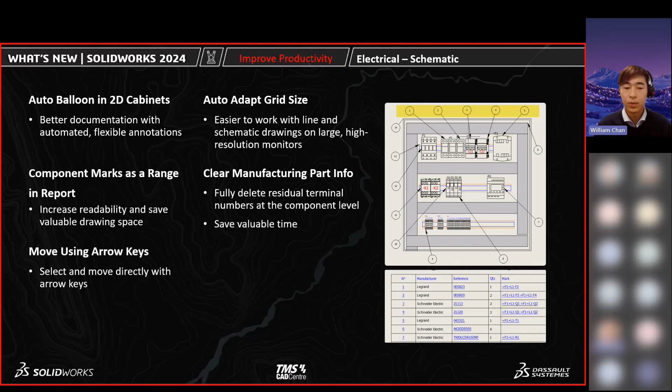Let's now have a look at the enhancements to electrical 3D. In 2024, there is a new option to route the active location only. We can see here we have our location L2, which has all our connectors inserted to the assembly already. Let's go to the route harness command, and in here we can find a new option to route active location only. Enabling that, and then we'll just complete the route harness command, allowing us to generate the harness in location L2. We can see our other route is unaffected as the connectors are in a separate location.

The next enhancement is the ability to filter components in the electrical management tree, giving you more control over what you want to see within the tree. Pressing the filter icon, we can filter by associated manufacturer parts, accessory manufacturer parts, auxiliary, as well as manufacturer parts excluded from the BOM. You can check any of these options simultaneously or just completely turn the filters off as well.

So we just went through the route active location option and filter manufacturer parts. Some additional enhancements for electrical 3D in 2024 includes the ability to choose whether, when you duplicate a project, it should remove or retain a link to the original assembly.

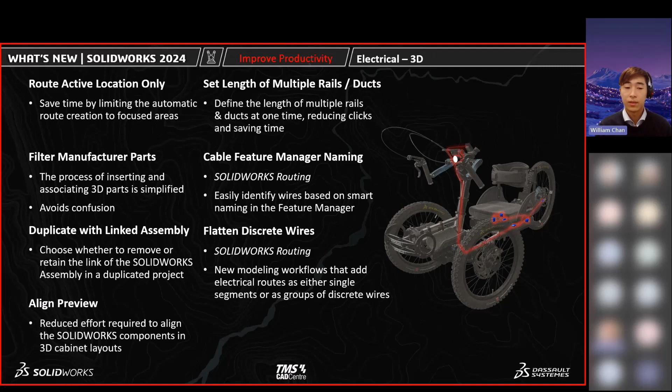The final enhancement with electrical routing is the ability to create a distinct route for each wire, or merge wires into a single route for discrete wires using the auto route tool. This allows you to visualize each wire in a bundle distinctly in 3D and then flatten them. That was just some of the enhancements to electrical, and that completes our improved productivity section.

I'll now pass you to James, who will go over the focus on design section. Thank you, William. So here I'm going to take you through the focus on design, which will look at all the various cloud services and how you can use them, all available for you today on any new licenses or upgrading existing ones.

First of all, we'll take a wee look at Bowhead and how they use and take advantage of cloud services. Just bring the video here. There we go.

We are using the platform to store all of our CAD data, all of our test reports, and non-CAD documentation on 3D Space app of the platform. We use the maturity states to control if a particular document, part file, or drawing is being worked on or if it's released. This helps us to understand what is the latest revision or the latest state of a drawing or file.

Prior to using the platform, revision control was basically renaming your part file to be revision 1.1, 1.2. There were instances where there was a final revision, then there was another final revision. So we were using computers, but it felt like we were using Stone Age technology just to manage revisions.

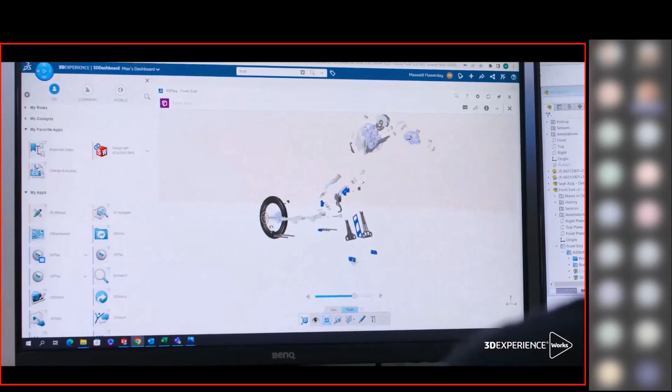One of the things that I really enjoyed was giving access to the platform to other non-CAD users in the company who needed to be a part of it because they do so much with the data that is on there. And I didn't really have to hold their hand and teach them. I just had to send them a link where they created their user credentials and they started using the system like pros from day one.

So there we've had a wee intro to see how Bowhead used their cloud services. In this instance, we split the cloud services into almost three different buckets, each progressively taking more advantage of what's available in the platform.

There's also different ways you can share, whether you want to share a part that's editable, like with a SolidWorks part file, or a 3D XML, which is the 3DEXPERIENCE file type that's almost a view-only sort of mode. It's a nice feature to get some feedback with external collaborators.

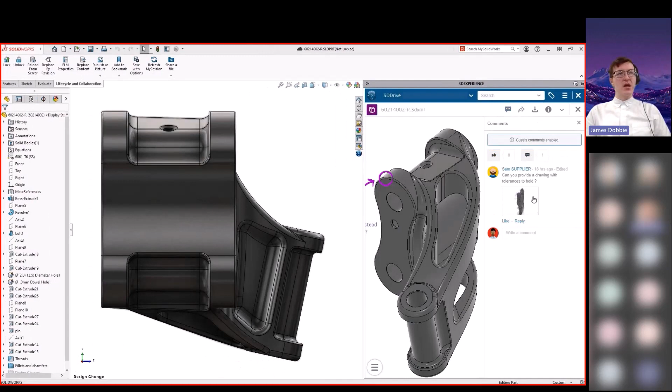They just save that as a comment and post it to you with a wee message. Got our information, they can then give a wee reply there. Then within SolidWorks, you'll get a notification to say there's been a comment added. You can open that up in your task pane, click on their comment, and see all the annotations they made, especially from the view they made it in.

So you can exactly see what they were looking at when they made that comment, and now action those changes. Then we can save that out to the platform. Here we can simply add revision comments - this is a new revision. We hit save and that will upload it to the platform. So on the drawing we've got a revision table that automatically updates, pulls in those comments, and helps you keep track of all the progress on the design.

So there's no need to keep moving your folders around - it's all there for you to keep track of, so you don't have to dive around folders all day. With the new revision available, you can now choose to share this drawing, just like sharing a part, and share that out as a PDF nice and easily in the same way. You can control access to that with either emails or almost like a public link.

Obviously the 3DEXPERIENCE platform is your design hub. You get powerful search capabilities in terms of finding files, and you'll be able to find your assembly design with ease, fully supporting all the favorite features and things like references.

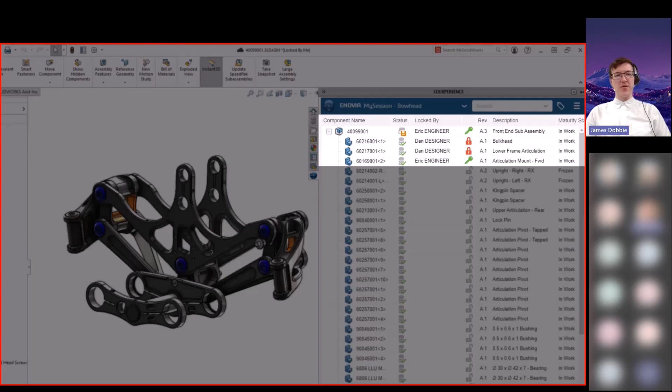With all your designs securely stored in the cloud, you can access them from anywhere you've got a browser and an internet connection. You can preview your designs in the browser straight away.

So if you're on a trip visiting potential clients and need to show them parts, rather than finding someone back home to email parts back and forth, you can just log into a browser and show them there. You're able to take advantage of all the powerful capabilities for reviewing designs.

You can also explore the structure of your design here, with built-in search tools allowing you to easily navigate to specific components of interest. You'll be able to focus on specific parts and access all the associated custom properties, all without having to open SolidWorks.

You can do it all in the cloud. You don't need to be a SolidWorks user to take advantage of all this information available.

When you're ready to bring more structure to your engineering process, you can use cloud services to use tags to filter your designs by status, formalizing your release process. It's all done with a nice drag and drop that lets you move through that design route—in this case, just drag and drop files.

We're now sitting on release here, and we've got this route that's going to take us through that path, whether it's a linear approval or parallel approval. You can assign that to various members of the team.

You've got all these comments as you go through, and here we've got different information we can pull up on that part through the different history as well. We can see exactly who made what changes and when.

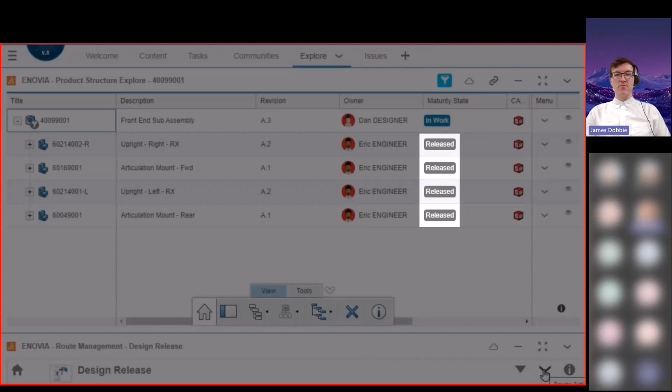So not only can you manage your approval process, you can also track and resolve any design issues. These can all be easily visualized in a list depending on their status, or visualized in the assembly itself with little tags, providing feedback on what the issue is and who has identified it.

You've got that public comment stream as well that everyone can access within your team, with detailed descriptions you can go in and create for that issue. In this case, for a quote, we've got the different files attached to it, so we know exactly what files are involved, who has been assigned to do it, and who owns the task.

And we can always comment on it here, which saves things being lost in an email chain. We've got all the comments nicely to hand there.

Once you've done that, it's just a simple drag and drop to move that task into the next step—in this case, that was 'in work.' We've made the changes we need, and we can export all this information out if we need to compile any reports, nice and easily.

If you need to keep track of any issues for design meetings, you've got all that available to you in a nice pre-formatted presentation, which you can then tweak to your own desires.

That's really just the start of the cloud services. It opens the door to using the next generation of design tools, more powerful simulation tools, and other manufacturing tools as well. You can really accelerate your design process and make things more advanced and complicated than you could potentially do in desktop SolidWorks. It allows you to stay focused on the design without having to worry about all the extra management, which is taken care of.

So what I'm going to do is take us through the next section of the cloud services, covering expanding horizons. We'll split into two sections: first I'll take you through the next generation design, then it'll be back to James for simulation. Inside next generation design, we'll cover four main sections: X-Shape, X-Design, X-Generative Design, and Lattice Design. These are all different ways we can create our models in the platform.

With X-Shape we get more of a free-form modeling idea, where we can push and pull our model apart, almost like clay modeling. X-Design is a bit more like what you'll be familiar with from desktop SolidWorks, with the usual features, plus some enhancements. X-Generative Design is a new app where we can take a model we've created, whether with X-Shape or X-Design, and start to create alternate versions, almost like configurations, with different design looks using rule-based modeling.

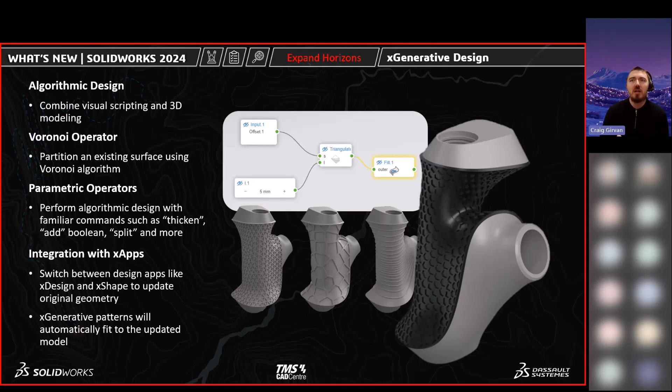Then we'll look at something new called Lattice Design. This is where we might want to create the internal section of a particular part to reduce the weight of the component while still maintaining good structural integrity, so we can look at different lattice designs inside there.

When you start to evolve your SolidWorks designs and inspiration comes to mind, you don't want to be limited by the CAD package you've got installed. That's where we can use the 3DEXPERIENCE platform and its different creative apps to bring your ideas to life, whether through freeform subdivision, surface modeling, traditional parametric modeling, algorithmic design, and more.

With all of these tools we've got the same built-in collaboration features that James just went through, making it easy to share ideas, feedback, document and create markups, and all that sort of thing. We'll go through X-Shape, X-Design, X-Generative Design, and Lattice Design.

These are designed to work in conjunction with SolidWorks, not to replace it. Desktop SolidWorks that you know and love isn't going anywhere. These work hand in hand, so you can easily jump back and forth between them, and we'll see that in the demo, jumping back to SolidWorks at certain points.

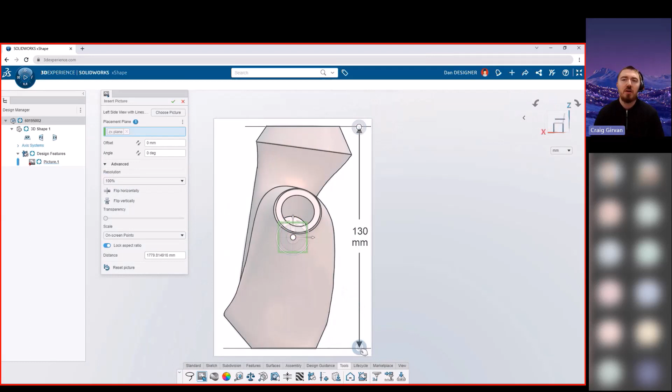We might want to insert sketch pictures to give us a rough outline of our model, then create a basic box shape and split that up into a number of sections. Then we can start to push and pull any faces or vertex points to give us a very rough outline, without having to create sketches from scratch, which might otherwise take hours for more complex shapes.

We can start to snap entities into line, dragging and dropping them to particular endpoints in our sketch picture. If we want more detail, we can split our sections up or create extrudes to add finer detail. Any edges can be made sharper or more rounded depending on how much we want sharp corners, and we can push and pull those values by set dimensions if needed.

We can also draw in where we want things to align. Obviously if we're doing this on a tablet with a touch screen it'll be a little cleaner, but we can still do that all with our mouse if we want to. We can copy and paste any previous surfaces to explore new design concepts, potentially scale them up if we need to for any sort of injection molding.

And we can create mirrors using our reflect tool, so we can select what we want to mirror. And we can create our section views, and while in that section view it might make it a little easier for us to push and pull points and see how it behaves.

And we can use our mesh tools to see what the inside shape of that would look like, so we're pushing and pulling points inside the model. We can also turn on that graphical color if we want to see how our surface blends together, similar to the curvature tool inside SolidWorks.

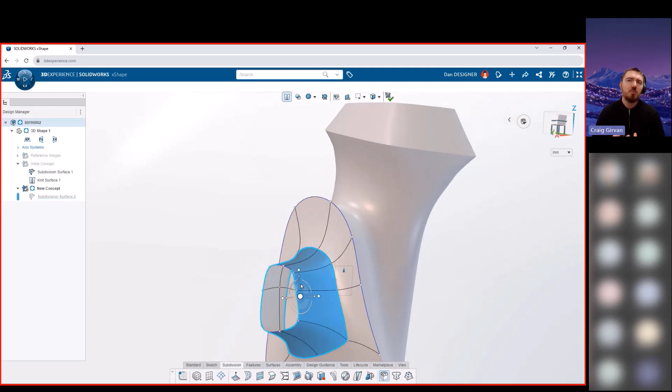We'll pull out this particular section, and what we might want to do is soft select some of the edges so we can try and keep a nice planar surface. We can pick a radius value, and with a nice planar surface we can create a new circle sketch on the side there, which we can use to create a hole cutout.

So we're starting to remove material, which we could also jump back into SolidWorks if we wanted to do a simple extrude cut. We could do that either in SolidWorks, or we could look to use Xdesign to do that.

Inside Xdesign, we can create either fillets or chamfers, or we can use what's referred to as our super feature. We can easily jump between an extrude, a revolve, or a sweep, so if we change our mind and want to use one of the other ones, we don't have to delete the feature and create a separate one — we can easily swap between them.

We'll have similar features to before, where we can add in our hole wizard, and once we've done that we can add things like threads inside there. We've also got similar surfacing tools where we can thicken faces, so if we start to do any surface modeling, we've got that inside there.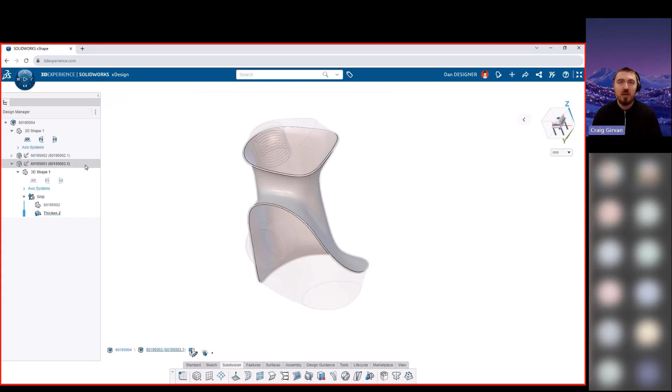And then we can combine those together to form an assembly. Still in that same Xdesign environment, same browser page, we can start to combine multiple components together to form our assembly. If we want to switch app, we can press our compass and potentially switch over to the X Generative Design app.

In here, we might take our design that we've already created and set certain rules and parameters so that we could potentially allow certain values to change, and then we can see what those particularly look like. So we might end up with half a dozen, 10, 20 different designs of our model.

And then we could look to compare those either by having different revisions of our model, or we could create different iterations of our model. So these are all still at revision A1, but we might have different models.

And if we've got to the point where we've created some of those, we might want to get them 3D printed so we can see almost like a bit of a prototype, and actually hold that in our hands. So if this is potentially going to be a grip that might be used in our vehicle, we might want to see what that feels like.

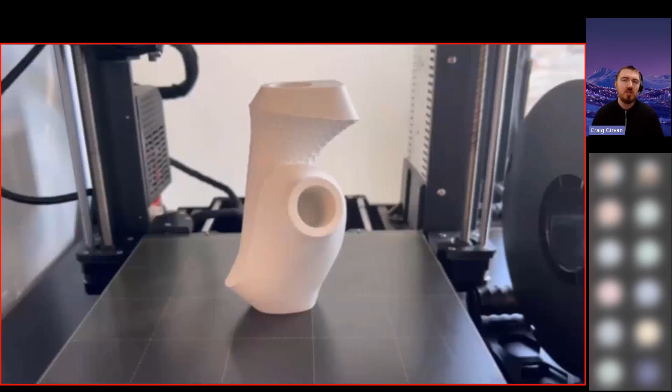So we can put in our parameters if we've got our own 3D printer, or we can look to outsource this if need be. And then we've got the end result there with our 3D printed part.

And whether we're using X-Shape, Xdesign, or anything like that, we've got our familiar tools that James took us through for creating our different revisions. So these are some of the other things that we can do inside the Xdesign app. We can create our other part, which we may recognise as one of the components that William actually took us through a little bit earlier.

So we can round off some of the edges. We can use our subtract tool to remove some of the material. And obviously we've got our Hole Wizard with our normal kind of sizes, or different sizes of holes inside there. We can create some offset surfaces, start to extend them, trim out our surfaces. Same similar surfacing tools that we see inside SolidWorks.

And we can soften some of those edges by adding in some fillets, either drag it manually, or we can specify a various value inside there. So that's where our subdivision tools can be quite handy.

But rather than us doing everything ourselves, we could look to use our Lattice Design Assistant. This is in our Lattice Design app. What we can do is have it create our lattice for us based on some pre-defined cell types. So we can pick the type of lattice that we're looking for, maybe change a couple of values to do with the length and the radius, get a little preview of what that looks like, and then it can generate our lattice.

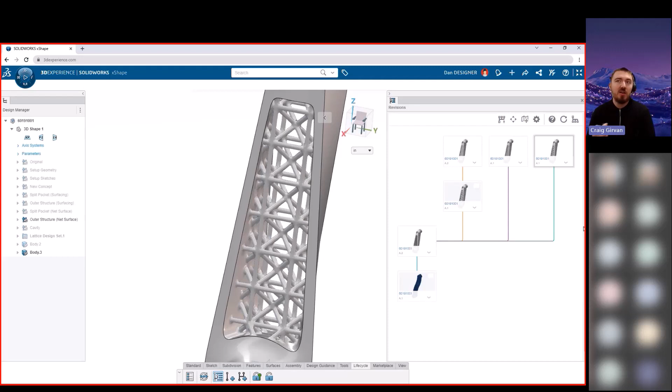Again, we might want to create different revisions or different iterations so we can see what those different lattice designs look like, check the mass, and then we might want to take it on to some of the simulation stuff that James will look at in a moment, to see do these other designs actually withstand the forces that's going to be applied, and our part isn't going to completely fall apart.

Obviously, we can start to combine all of those together to create our assembly. So that's still inside that X-Shape app. And we can drag in any of our other components, and we can take those components and mate them together using our normal mating tools that we're familiar with in SolidWorks. Create just one side, mirror them across. And we can still have things like our mate references, all of that inside there, and have them be created in for all of our different holes.

Once we've got that design created, if there's any components we need to edit, we can request that the user unlocks them if we need to make any edits. And at that point we've got our final design. We can check the movement of that in the browser, and that will just replicate exactly what it will look like if we were to open up inside SolidWorks.

And if we're happy with all of that movement, we might move that from our in-work stage to being approved. So we could do that potentially with a simple drag and drop to move any of the issues and stuff like that we've got over there. So that's just some of the next generation design stuff. Again, it's not there to replace SolidWorks, but to work more in conjunction with SolidWorks, so you can do it pretty much anywhere that you've got a web browser.

So I'll pass it back over to James, who'll go through some more of the simulation stuff.

All right, thanks for that, Craig. We just have to do a quick PowerPoint change here.

So what I'll be looking at is basically all the simulation tools available on the platform, some of which are more powerful than you can get in desktop SolidWorks, and some not even available in desktop SolidWorks. So in this case, the different simulations are broken down into roles, which all have names similar to maybe the job title of what you would have if you were doing this sort of work.

This first one, structural mechanics engineer, that allows you to analyze your designs in a wide range of scenarios. You've got an assistant panel which walks you through step by step, so if you're not quite sure what's next, that's there pointing in the right direction.

And it's not just limited to static loading. You've also got various dynamic loading, checking vibrations, getting the various power curves out of that. And also you have access to a huge big database of materials, and you can obviously create your own custom materials as well.

The next one here, durability and mechanics engineer, is more focused on analysing the life cycle of your part. So looking at things like factor of safety, so is there any yield in the part?

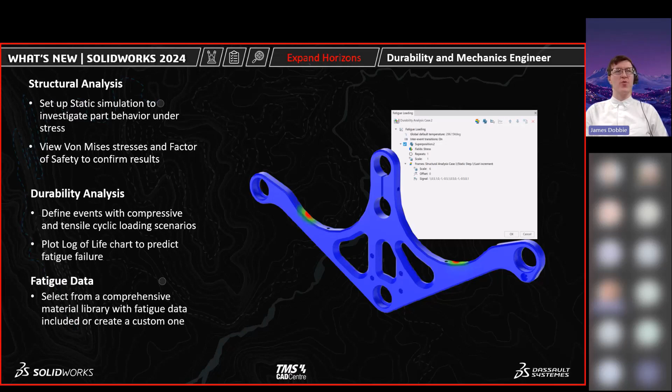Looking at more things like cyclic loading, both high and low cycle. Desktop SolidWorks is more aimed at high cycle fatigue, but with cloud simulation you can also get low cycle fatigue in there. This allows you to look at the part, see where it's going to fail, and potentially extend the lifetime of your part.

The Plastic Injection Engineer allows you to predict all phases of your injection molding process, looking at any defects you can get during it, such as sink marks, defects, warpage, and all that. You can fully analyze that there.

The Fluid Mechanics Engineer allows you to harness the power of the cloud to quickly and accurately solve complex simulations. In terms of aerodynamics or any other fluid simulation, you can solve that a lot quicker using the power of the cloud, without your own machine being tied down running that simulation.

The Electromagnetics Engineer doesn't have an equivalent on desktop SolidWorks. It allows you to do all sorts of electromagnetic-related things, like antenna design, antenna position, and antenna performance. You can look at interference with other objects - there are full libraries of common objects, even people. So you can put people into your products to see, if someone stands there, does it interact with the model, is there any interference there. You can also combine all your simulations and use different solvers to do it all in one go.

So here we'll look at a wee demo of this in action.

The cloud simulation is powered by the industry-leading Abaqus technology, allowing you to virtually validate your complex designs without having to create any prototypes, saving you money and helping you get to market faster and more confident that your product's going to work. You've got all the same built-in collaboration tools, making it easy to document and track issues with design. If any simulation flags areas of concern, you'll be able to easily flag those up to the relevant member of the team to address.

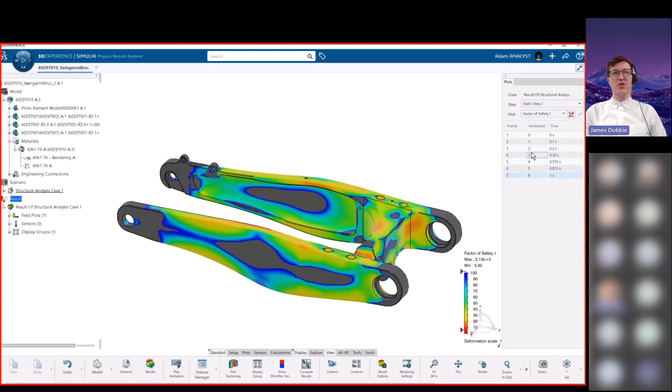We'll use the assistant panel to help set up this simulation, walking us through all the different steps. We'll be able to select the material from our library, apply a boundary condition, and then see all the factor of safety plots generated from that.

Here we can further investigate the effects of dynamic loading, looking at vibrations - if we're going over rough terrain, there's going to be a lot of vibrating as we go over each different stone. It's nice and easy to run this, define our bounding frequencies, get that power spectral curve, and run that vibration study.

The stress and displacement results give you insights into how that assembly behaves during that random vibration, allowing you to see what areas are of particularly high stress and of interest to look at. And of course, you can share all these results with your team using the built-in collaboration tools.

Sometimes a linear static simulation won't be enough. You need to look at things like cyclic loading of both compressive and tensile stresses that can lead to fatigue issues with your part. Sometimes these can be hard to predict, but with cloud simulation available, you can easily validate the lifespan of your parts.

The built-in library gives you a full range of materials with all the different fatigue data, and you can also add in your own. Just apply your boundary conditions, apply your loads, and run that there. That's where you can see where your part will fail, and that's included even for low cycle fatigue.

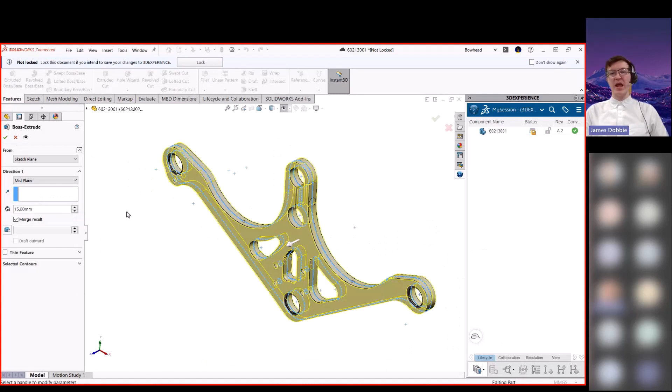With the tight integration between SOLIDWORKS and the cloud simulation, you can easily make design changes and rerun simulation without having to go through import and export into different file types across different packages. It's all there, and you can easily compare the results after design changes, which have increased the lifetime of our part here, with massively reduced areas of factor of safety concerns.

Now looking at plastic simulation, it's important to understand how the plastic flows in our mold, and if there are any cavities that could be critical to the quality of the part. Previously you might need a lot of experience to spot where these could be, and when it comes to injection molding, it's quite a costly process in terms of retooling and everything.

With the powerful plastic simulation tools you have at your hands, you can apply the material from the library, apply the various conditions, and set all the different parameters you need. Then you can right away see the issues. In this case, we've got some heavy sink marks, which are not desirable when producing a high quality part. This insight will help guide your design changes, making small changes to improve it and ensure optimum quality and tolerances.

When the plastic comes to cool, it's going to shrink and warp, and you need to know by how much. So you can pinpoint the warpage calculation and use that to accurately scale your design to make sure it fits your final product once complete. And of course, you can validate all of this in the cloud, so when it comes to manufacturing, you've got your mold right, and there won't be costly reworks of your molds.

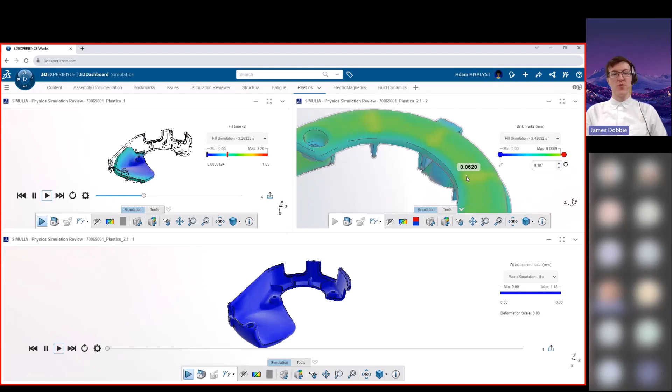When it comes to products, in this case this hand bike, you're going to be out in the real world battling against the wind. So you want to make sure, because it's a wee e-bike, that the battery life will be nice and extended. So we want to minimize drag here.

So in this case, we can set up our powerful fluid dynamics study, design our boundaries, set things like the wind speed, and then using the power of the cloud, have that run nice and quickly without us having to use our own machine. It's not sounding like we're standing behind a jet engine as it runs - we can all go on and do other work. And we can explore all the velocities, pressure fields, and streamlines to help validate the behavior of your part.

In this case now, with electromagnetics, more and more devices are connected through Wi-Fi, Bluetooth, and mobile phone connections. So you want to make sure your devices will maintain connection, and the antennas are well designed. With that, you'll simulate the placement of devices as they interact with each other, looking at all the far fields and electric field plots, moving around in different positions and orientations, allowing you to make more informed decisions about the placement and design of antennas, and materials of the casings, to ensure there won't be any issues.

Now, with 3DEXPERIENCE simulation, you've got the power to solve very complex design challenges, and you've also got access to all these views that let you view the results online nice and easily. You can review them, and that allows you to make sure all your designs are validated, allowing you to move forward with your best ideas.

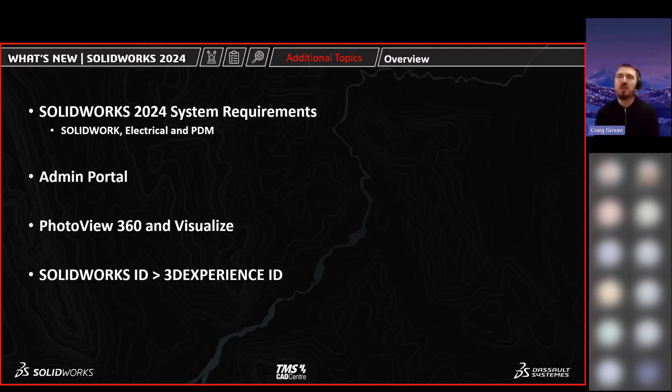So what I'm going to do is look at a couple of extra things - a little bit about when you can get your hands on SOLIDWORKS 2024, system requirements, anything you might need to watch out for if you're going to upgrade. I'll talk a little about the new admin portal, a bit about PhotoView 360/Visualize, and then finish up with the change to the SOLIDWORKS ID to 3DEXPERIENCE ID that happened earlier this year.

If you're looking to upgrade to SOLIDWORKS 2024, you don't need to worry about any changes to the hardware requirements. So if you're using SOLIDWORKS 2023, you don't need to worry about needing a new hard drive, a new graphics card, more RAM, or a better CPU. You can keep the same hardware you've got at the moment.

The only thing I'd point out is that with each release of SOLIDWORKS, the recommended graphics card drivers will be updated. Whether you've got NVIDIA, AMD, or now Intel GPUs, they release updated drivers very frequently - sometimes every week or every second week. But SOLIDWORKS tests those at different points of the year, so with 2024 they'll have new recommended drivers. You might want to have your IT update your graphics card driver if needed for 2024.

A couple of other things to point out are more to do with SQL and operating system requirements, which apply more to our network license users, PDM, or electrical users. If you're going to use 2024, you don't need to worry about any changes to the Windows version - you can still run Windows 10 or Windows 11. That's not changed.

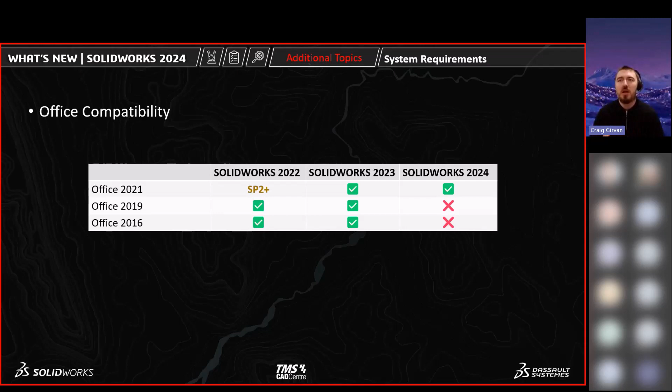Finally, there's a change here to the admin portal. Some of you may have used the old SOLIDWORKS admin portal, which started to be phased out back in SOLIDWORKS 2019 when there were changes to online licensing. By end of 2022, start of 2023, that old admin portal was pretty much made fully redundant for anyone in the UK, and other places in the world have come on board too. There's now a new admin portal available - generally for your SOLIDWORKS admin managing your licenses. To access it, you need to be classed as what SOLIDWORKS call a security admin, usually your SOLIDWORKS admin.

And what you'll actually be able to do on that new admin portal is you'll be able to view all of your serial numbers. I know a lot of customers forget their serial numbers and usually have to call or email us to find out what they are to do an install. You'll be able to see all of those, when those serial numbers expired, when any subscription date is up, and even see where those licenses have been activated. So if you're wondering what machine is using what serial number, you'll be able to view that there.

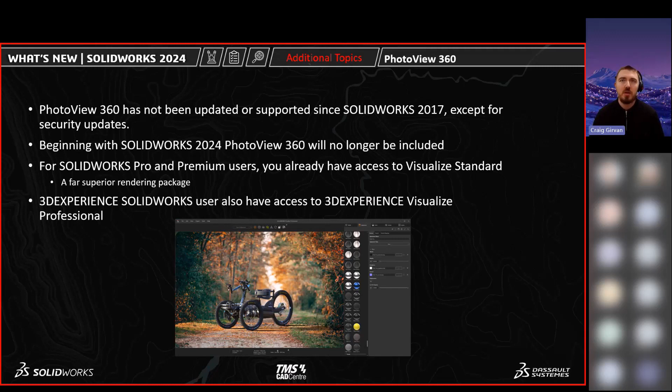The last thing I want to point out is the change from SOLIDWORKS ID to 3DEXPERIENCE ID. That was one of the changes that for most people in the UK happened end of last year, start of this year. If you ever used to know something called a SOLIDWORKS ID, that name is now referred to as the 3DEXPERIENCE ID. Otherwise, it's pretty much the same - same email, same password, you don't really need to do anything. You may not even have realised you're actually using a 3DEXPERIENCE ID now, but that's the account you'll use if you want to access the SOLIDWORKS downloads, the admin portal, or any of the new stuff in the 3DEXPERIENCE platform.